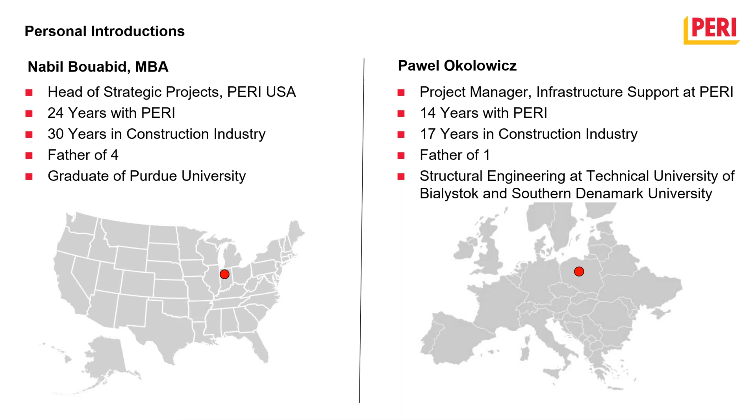Thank you, Pawel, thank you very much. Could you go to the next page please? I'm having Pawel presenting, so you're going to hear a lot from him, guys. We're going to be discussing today the LAX project, and we're going to go over a general overview of the project, an introduction to the balanced cantilever. We're going to speak a little bit about customer requests as well, and design processes that Pawel is going to present for us. And later we're going to talk about field challenges, assembly and disassembly, and after that we're going to move into a Q&A.

The LAX project is to modernize LAX and alleviate the heavy congestion typical in and around LAX. The LAX APM project is about 2.25 miles of elevated guideway, and it will be transporting passengers between 6 stations over the alignment. 3 stations are within the LAX terminal area, and 2 are at the parking garage transit center, and the final terminus is the new consolidated rental car facility.

LINXS Constructors JV is the contractor, and PERI, we were working directly with Flatiron on this project. PERI USA was awarded the cast-in-place segmental scope on the project only. We worked on the GW1, Westway Street, spanning over the parking lot with double span cast-in-place segmental. We also had GW4 spanning over Sepulveda Boulevard, single span cast-in-place segmental. And the last one was GW5 over Century Boulevard, single span cast-in-place segmental, which we will be mostly discussing in this presentation.

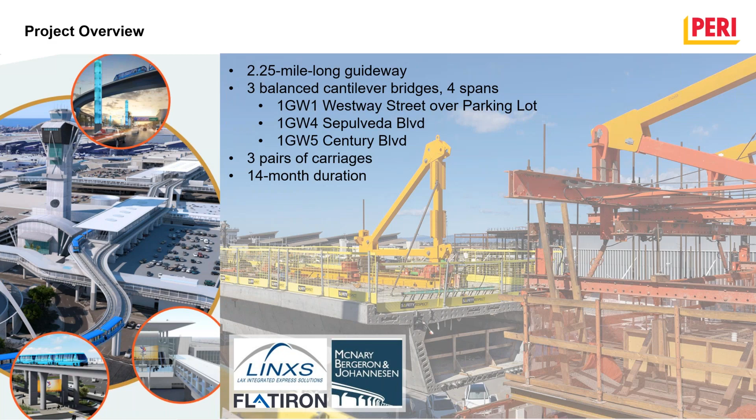Next page please, Pawel. Next one as well. A little overview of PERI balanced cantilever, as it's very simple and straightforward here.

We see the yellow frames on the top, and later you have the front main beam, the bottom platform, which is suspended from as well. You have the main truss, which holds everything together, and the bottom platform in the rear is also suspended from it, and you have the carrying rail for the carriages. We see the carriages and the carrying rail that are basically anchored to the deck with 2 rods, or 2 anchors each.

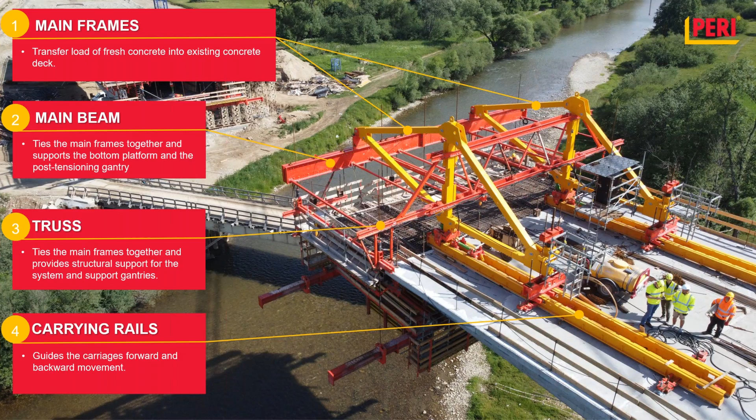We see here as well the internal formwork, the bottom platform, and we also have the external formwork, a straightforward system.

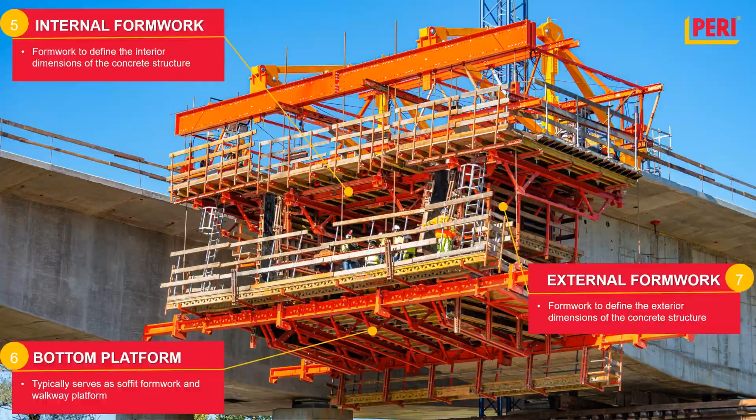I will turn to my colleague Pawel. He's going to discuss a little bit about geometry and the design process for this project. Please go ahead, Pawel. Thank you. Yeah, so thank you, Nabil.

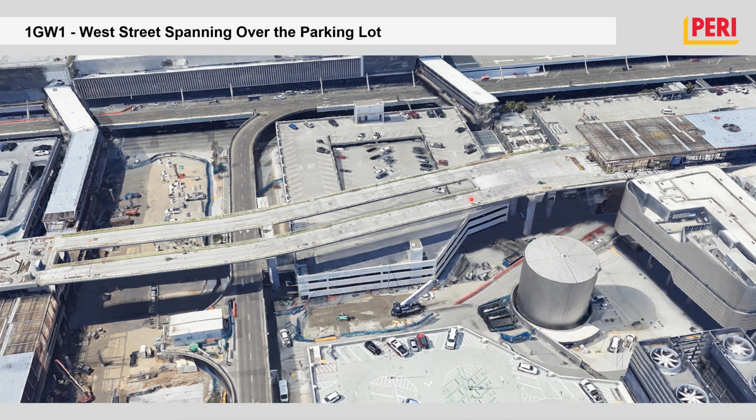I will speak a bit more about these viaducts, which were in the scope of our part. First, the longest one was a 2-lane viaduct spanning between these piers here. This part was actually done over the parking garage. If you look at the technical drawings, you see that it's a 2-lane bridge. What is interesting here is that the span itself, as it was designed, was not really symmetric. The left side here was 9 segments with 15 feet each segment, and on the right side there was only 7 segments. So there was also a closure pour which was 7.5 feet long.

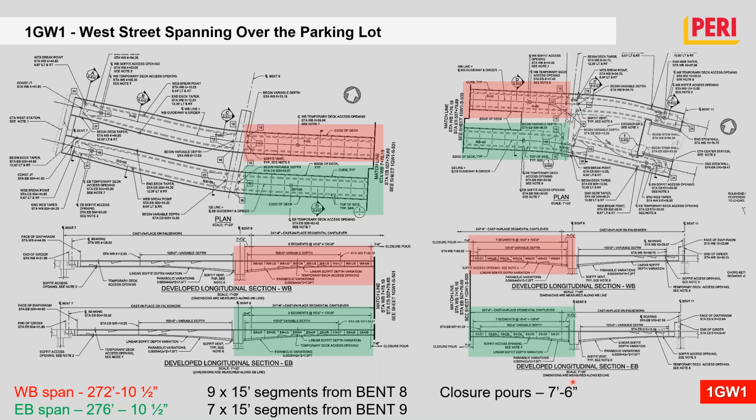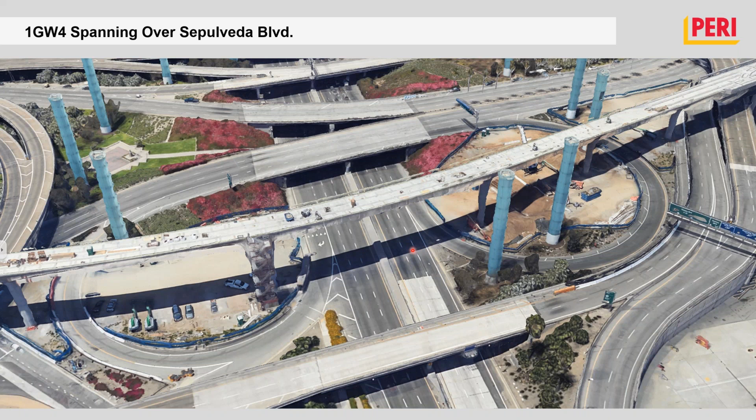So that was the longest, and then the next one over Sepulveda Boulevard, already above the traffic, so more critical than above the garage. It was 6 pouring segments at each side of the span, plus of course the closure.

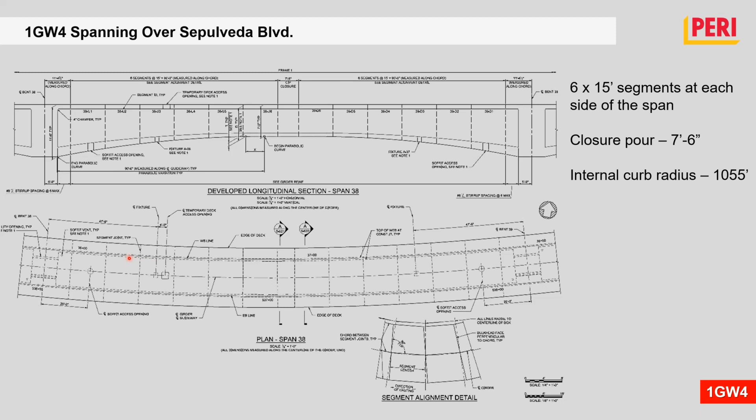That was already a little bit curved, but the curve is not so bad, not so critical, we don't need any special operations for such curves. But then if we look at the next one, I would say that was the most challenging one, because that's again above the traffic.

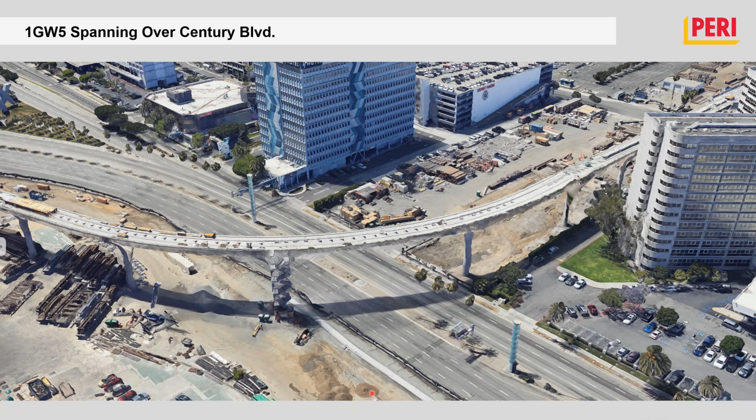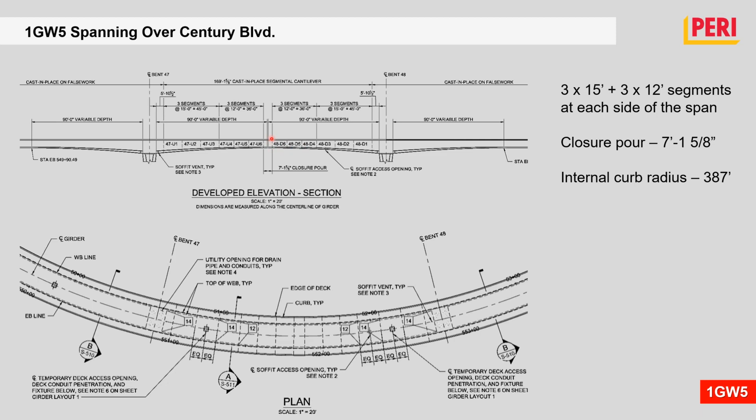That's actually the main entrance road, the Century Boulevard main entrance road here to LAX terminals. And that was actually also the most interesting, because it had this radius, it had a curve. We had to turn with the carriage a lot. The curve radius was 387 feet. Also interesting was that these segments were 6 segments at each side, but the first 3 of them were 15 feet, and then shorter ones at 12 feet, plus of course the closure pour a little bit more than 7 feet. That's already a nice picture that I got from Flatiron, thank you for that, a nice view of the construction of that viaduct.

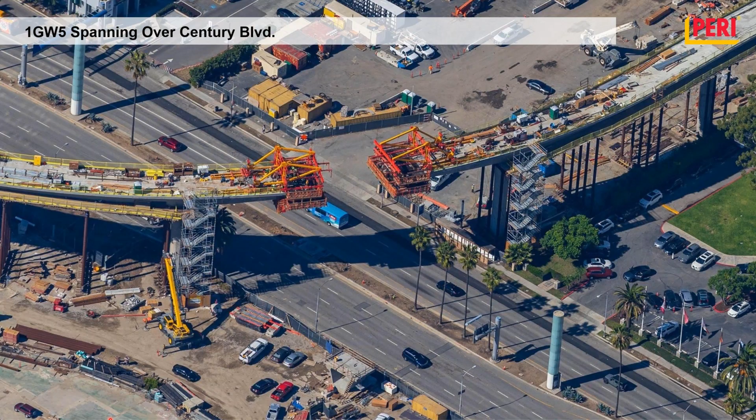So let's go to the concept, to speak more about the details, how did we approach the job at the early stage. First, when we are getting the geometry and planning our solution, for us the most important is to find out what is the geometry to which we are planning the system.

Pawel, I'm gonna stop you for a second, could you adjust your screen please, thank you, it's zoomed in too much. You are zoomed? Really, yes please. Thank you, I don't know, at my screen everything looks okay. No, it's fine. Okay then it's my screen, sorry about that. Yeah, it's fine. Okay, good, all right.

So anyway, we are getting back to that. Speaking about the geometry of the bridge, you're looking here at the cross section at 1GW1, pretty typical with inclined walls.

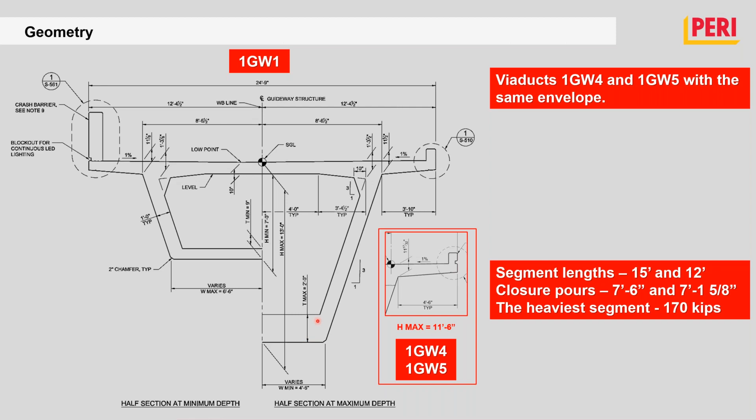And then there was 2 more viaducts, and very important for such a project is to minimize variations of the system. If we have 3 viaducts, the best would be that we could actually use the same carriage. Actually the design here was very nice, because if you look at 1GW4 and 5, they were a bit lower sections, and the only difference besides the height difference of the cross section was the wings, the side cantilevers.

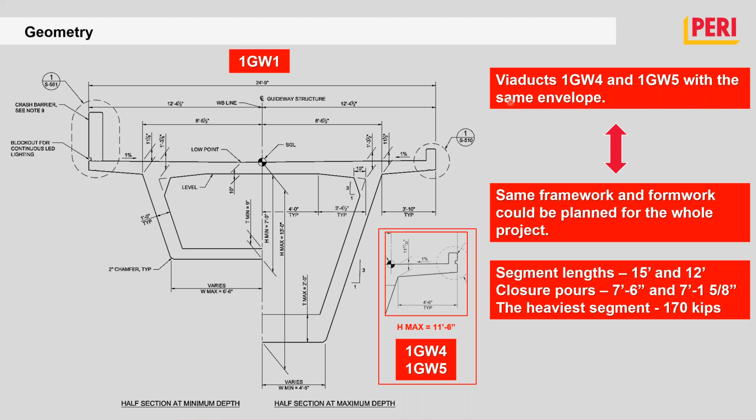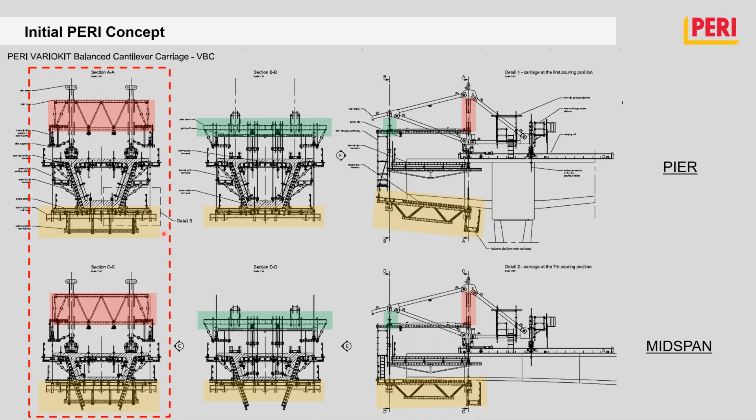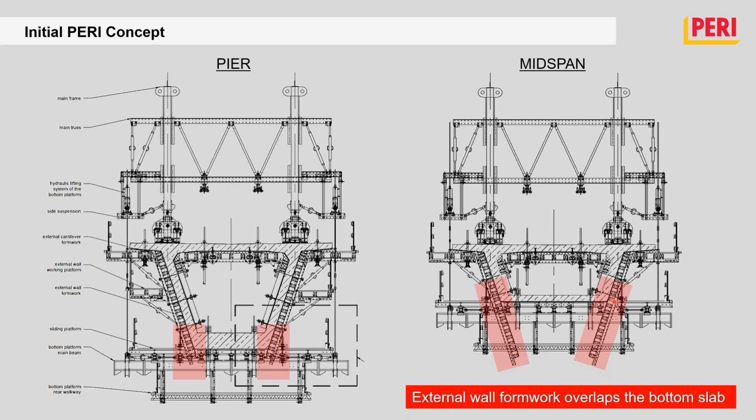Next slides, we're gonna focus a little bit more on these, just to zoom in a bit. So our initial concept and our standard solution for such bridges is to have external formwork overlapping with the bottom slab, that requires openings here. So as you see here, the external formwork is just a wall, actually sticking out a little bit down, but as I said, that requires openings. Then also another thing, speaking of our standard approach, is these side walkways.

We have these side walkways in order to avoid having any tie rod in the bottom slab or underneath. These walkways, if you look at them from a top view, are trusses which are pushing the external formwork to avoid having tie rods underneath. They are just transmitting the pressure of the concrete to this beam, so this beam is kind of a tie rod.

One last thing, speaking of the bottom platform, is the expandable formwork. As I said, the bottom slab needs to be expandable because it's getting wider as the cross section is getting smaller. These trusses here, you see them as a beam, but they are actually trusses, and they are slidable, especially the ones on the side. So that was the first concept.

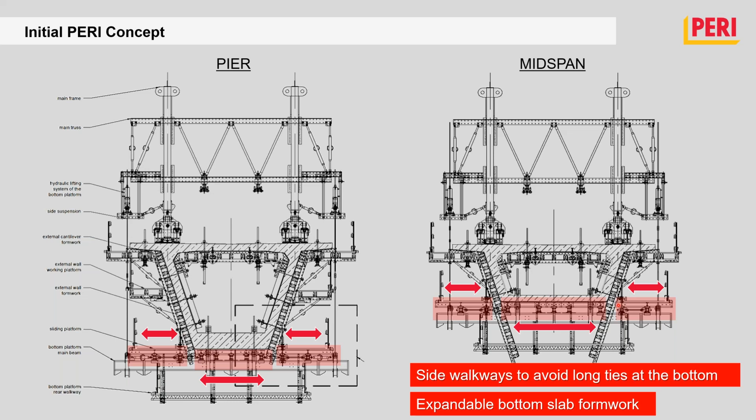That was the first concept which we presented to Flatiron. Then there were also some discussions later about implementing a rear trailing platform, which was supposed to be connected to the bottom platform. It's kind of a tail from which you can access the previously constructed segment, to do all the patchworking on the tie rod holes. You can also patch the anchor holes, or just do simple cosmetics if required.

Also, due to collision at the beginning with the pier, it was possible to hinge it down and then hinge it up afterwards, once we got to the segment where there is no collision anymore. But this was terminated, especially due to the fact that we are working above traffic, and this is a much bigger area to secure against any debris falling and so on. So this was terminated.

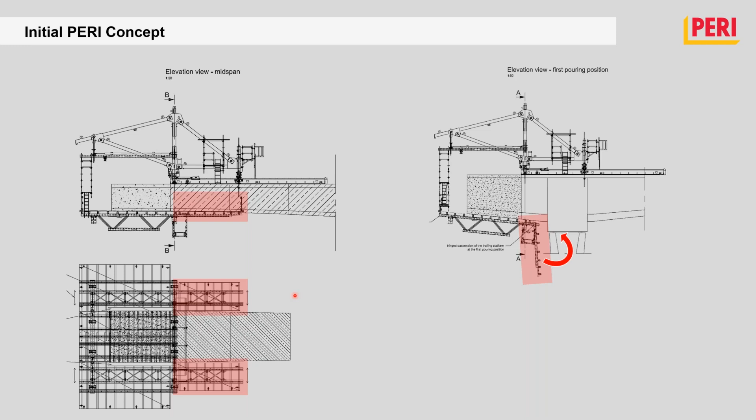That's already close to the final concept. After several discussions with Flatiron, we realized that there is traffic underneath in most cases, and we cannot allow anything falling down on the street underneath. So a solution was worked out together with Flatiron to make a full planking, fully closed planking on the bottom platform, with no openings, so that nothing can go through and fall down.

The change in comparison to the initial solution was that this external formwork was cut here. So any time we are launching the carriage to the next segment, this formwork needs to be cut as the cross section gets smaller. That's actually a pretty normal situation for internal formwork on bridges with changing height. We do it like that, and this part is just made of timber, so you just cut it.

The tie rod was also put underneath the bottom slab, as the bottom platform was a little bit lower. Here we had timber, and this was the way to secure the bottom part, especially where the bottom slab is higher, since we have bigger pressure from the concrete in the bottom part. So here we had our tie rod.

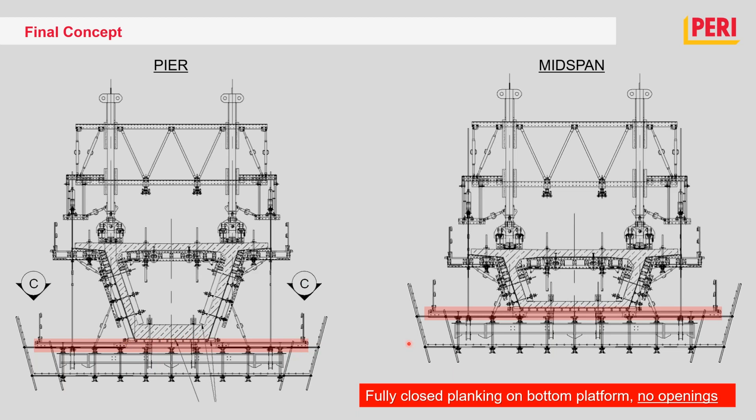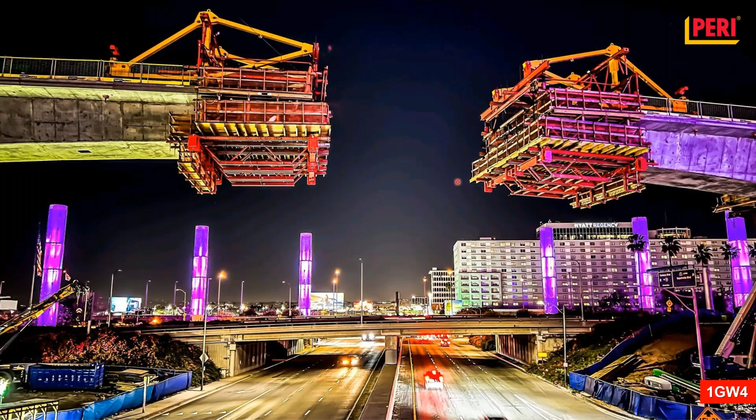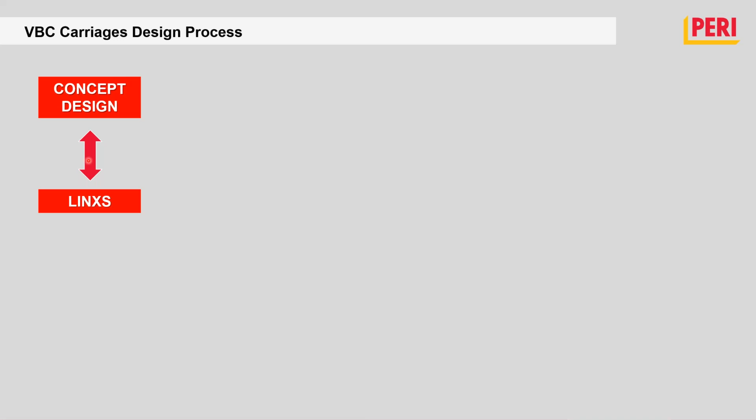Let's go to the design phase. The whole process was looking more or less like that: we came with a concept design to our customer, and then we worked out the concepts. We aligned our concepts, listened to the ideas and requirements, and that is how the final geometry was worked out.

Then, when we have the final geometry worked out, before we pass it to statics, once more we do a peer review with the customer. When this is accepted, we go on with the static analysis. As we have a geometry, we know how the formwork will look like, we know the critical cases, and this is the moment when we can already start with our analysis.

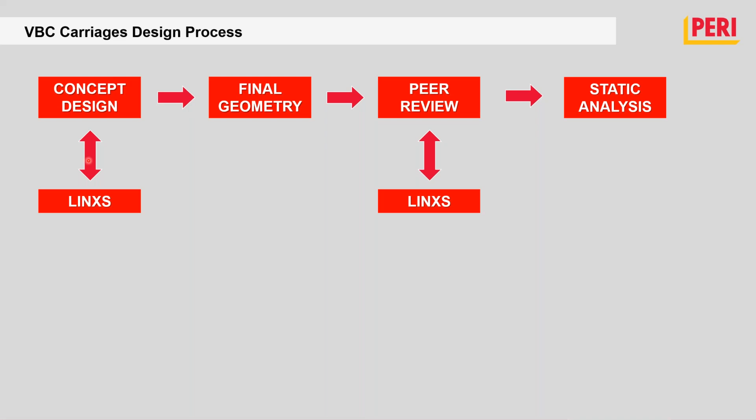If we know that all conditions from the static analysis are done, we can continue with production of assembly and general arrangement drawings, design. Then once more, the peer review, when let's say 80-90% of the drawings are finished or close to finished, before approving, there is one more peer review with the customer to see if everything, the drawings they will receive, is what they are expecting.

Then if we have a green light, we go on with approving the documentation and passing it to the site. In parallel, material lists are created and sent to the supply chain management department, which organizes all the parts to send them to the site.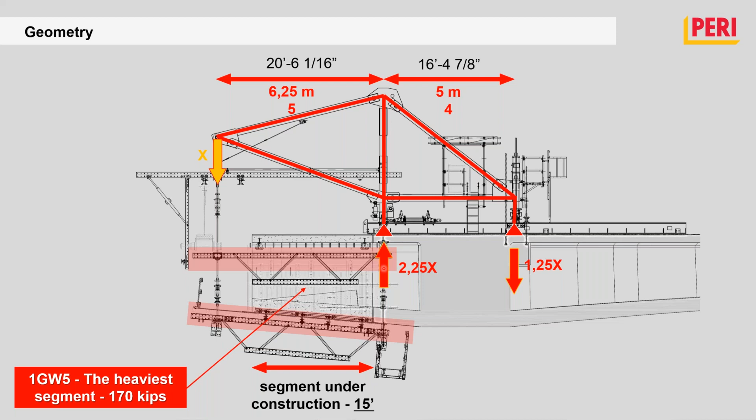One of the first things required for a global analysis of the bridge, checking the structure when it's loaded with the balanced cantilever carriage, is to provide bridge designers with the self-weight of the carriage - the complete self-weight. In this case it was around 135 kips - and the center of gravity, meaning where this load should really be assumed to act.

That was approximately 5 feet from the axis of the main column - meaning the center point of the main frame, the whole framework. So if this axis of the main column was 1 foot from the pouring joint, then it's around 4 feet from the pouring joint where the center of gravity was located. That's important for a global analysis of the bridge, I assume.

Also interesting is that one really movable thing here is the carrying rail. In the pouring situation, it's located on the existing concrete. We always try to make sure it doesn't stick above the segment under construction, so as not to be an obstacle to finishing the upper surface or even placing reinforcement. Then when this segment is done, the cross section's rail is launched forward on top of the existing concrete, and then the carriage moves on top of it.

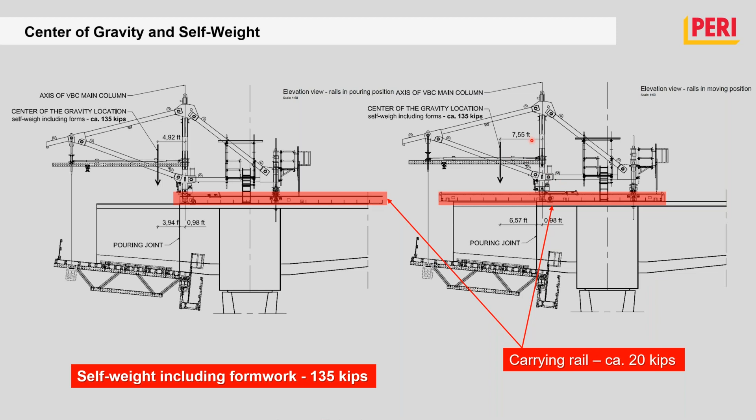This carrying rail weighed 20 kips, which influenced the center of gravity location by 2.5 feet. So once more, about the most important thing - the formwork.

We have several panels here. What you see is a cross section AA, in the plane of the main column of this frame. This is above the concrete where everything is anchored, and BB where everything is suspended.

So the internal formwork, as I said before, every formwork is anchored in the back and suspended in the front to the carriage, anchored in the back to the existing concrete. That's what you see here, and the suspension in the front here.

And then we have external formwork. In that case, this is connected to the wall and slab formwork, with only one anchor here, but also this formwork was supported on the bottom platform, because when we have inclined walls, it's not only the concrete pressure that has to be taken by the formwork. For concrete pressure we have tie rods going through the wall, but when the wall is inclined there is also a concrete load which has to be taken down, and that's why we have these spindles here.

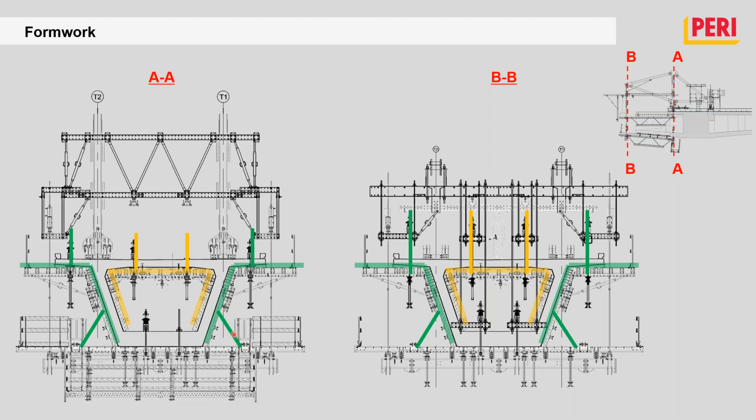The same here. And then bottom platform also anchored in the back, in the bottom slab, in this case in the concrete, and in front suspended at the same level, but this is suspension to the main beam. On the external part, outside of the concrete deck, we have a suspension to the truss and to the beam that is used in several situations, that is used to lift this whole platform from the ground by hydraulic jacks.

It was not done like that here because of the traffic mainly, but this is possible also to lower. But also when we want to launch the system, we cannot launch when we have all these anchors in the concrete. So when we are removing the anchors from the concrete, the platform is suspended on these external tie rods. This is actually DW26, and anchors normally we use DW40.

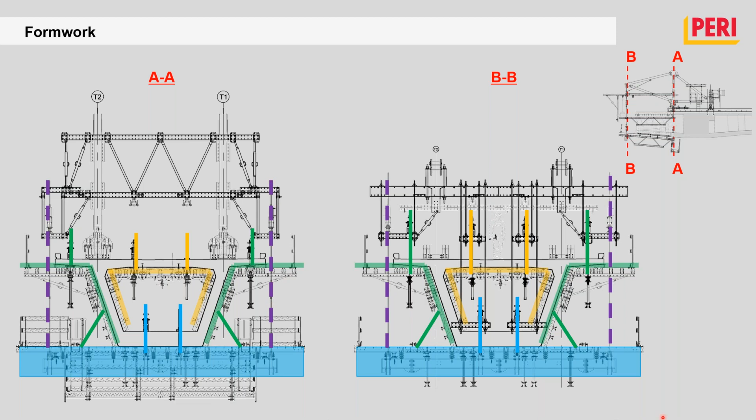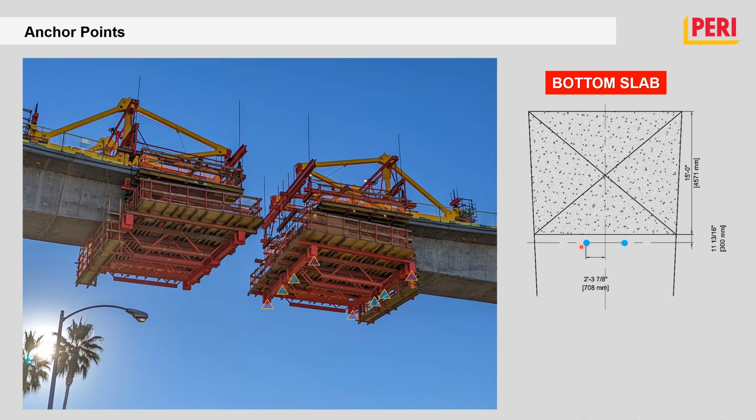So that's what you see here: front suspension, side suspensions of the bottom platform, and this is the anchorage in the concrete. That's already a bottom slab top view. Here is a pouring joint, and these are the two anchor holes for the bottom slab.

Then the complete picture of the anchor sleeves location. That's the same story here. Top slab, we needed, in that case, 8 anchor holes in the top slab, plus 10 anchor, plus 2 anchor holes to erect the next segment.

So the picture on the left shows external formwork, also part of the bottom platform. It's one anchor here, as you see, the same symmetric situation at the other side. And you have 2 anchors here, because it was 1GW5, where we have added an additional pair of anchor sleeves for every frame.

These squares that you see here are the place where the main frame is standing. That's a location above the wall of the main frames, and this is the anchorage. In case of 1GW5, we had to turn with the carriage, so we couldn't bind ourselves to one hole. It's much more comfortable to have 2 holes. I will show you in a moment why.

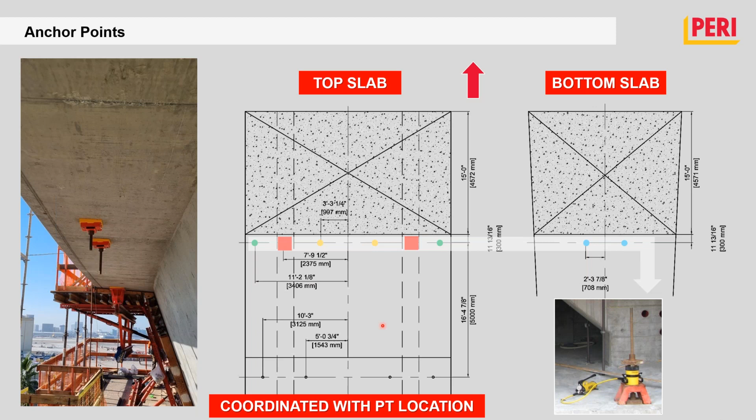And then the anchors of the formwork. Every anchor was pretensioned with force before pouring. And then of course there is required coordination with bridge designers due to PT locations of the PT cables. So it's always a challenge at the beginning to fit all these anchor holes between the tendons.

Let's go to reaction forces. I was saying that these squares are actually the location of the main column, this center part of the mainframe. Reactions here were the highest actually from the whole arrangement, 143.5 kips. Then in the back, I'm just giving the maximum from the whole project, spreading between 20 and 25 kips for each of these anchors.

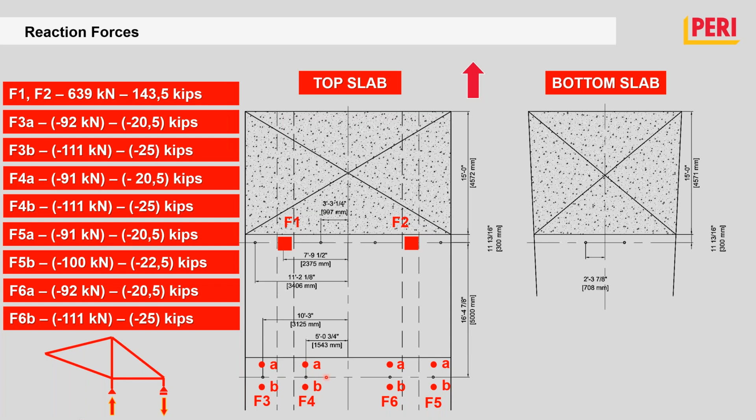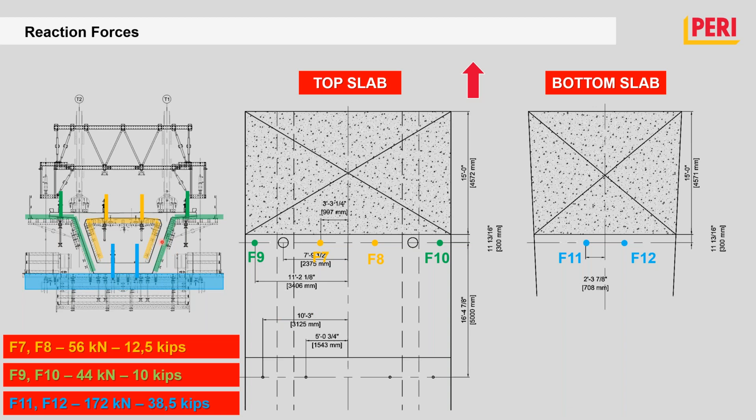Then formwork, internal formwork, 12.5 kips for each of these two. Then external formwork, a little bit less, 10 kips of reaction force. And in the bottom slab, a bit more because it's taking a bigger slab, it's also taking part of the load of the wall, 38.5 kips. That was the maximum for each of these two.

And all of them were pre-tensioned with force, with the hydraulic jacks, with the forces given here: 39 in the upper slab, 42 around, of course, because with the pumps that we have, you cannot really get the exact match, but around that.

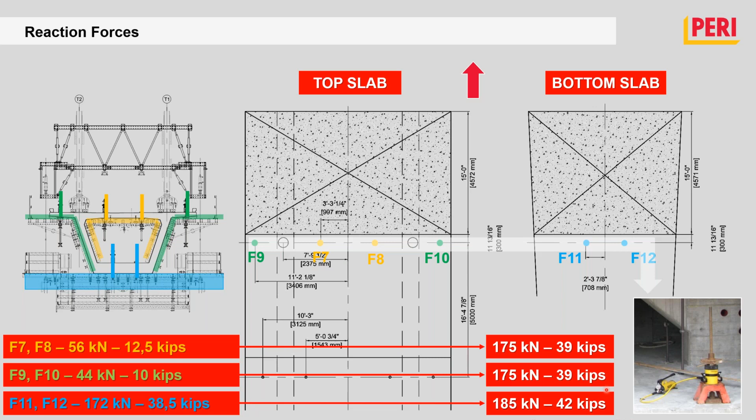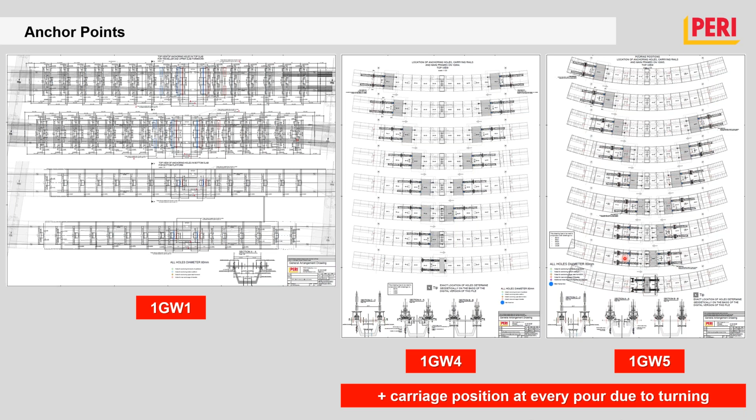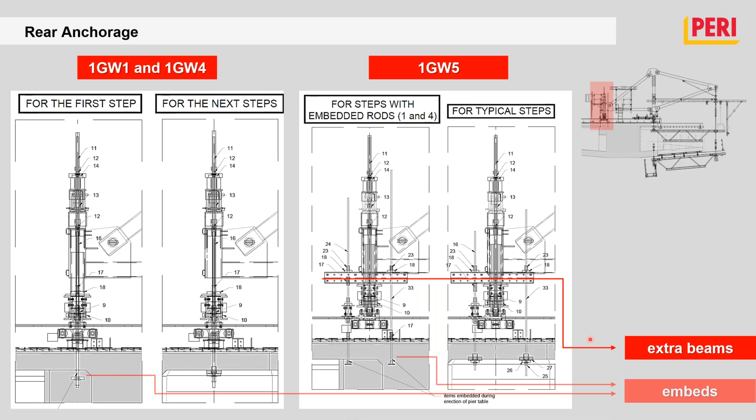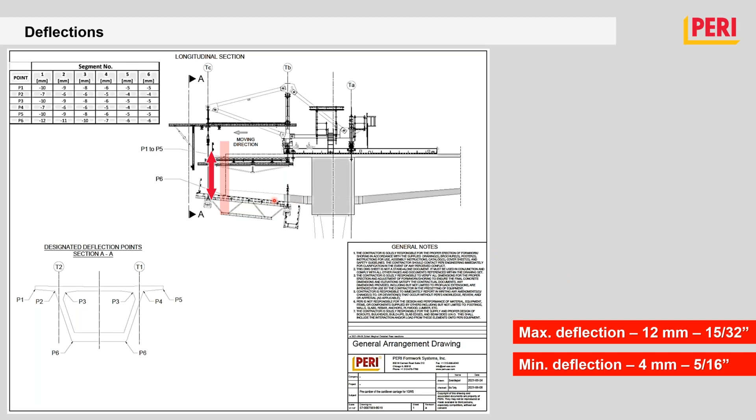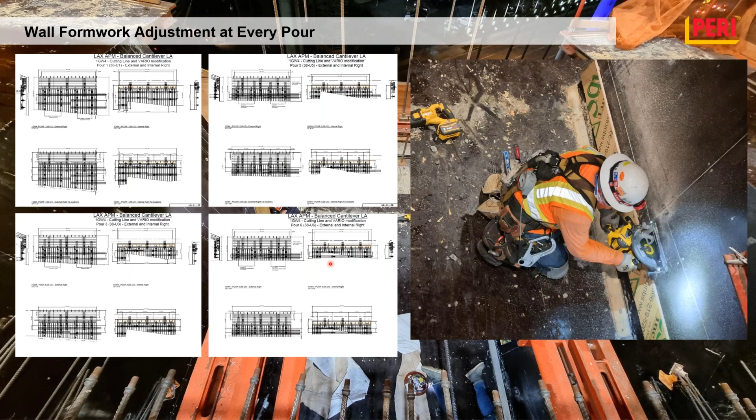As I mentioned at the beginning of my slides, we prepared the final solution where formwork panels, external as well as normally internal, and in this case also external formwork, were cut to the size of the segment. Here you see a guy preparing the formwork length for the next pour. For that situation, we provided the layout for every concrete segment in the project, including the cutting line showing how to cut the formwork, how to arrange the walers, and how to locate the tie rods. That was done for every segment in the project.

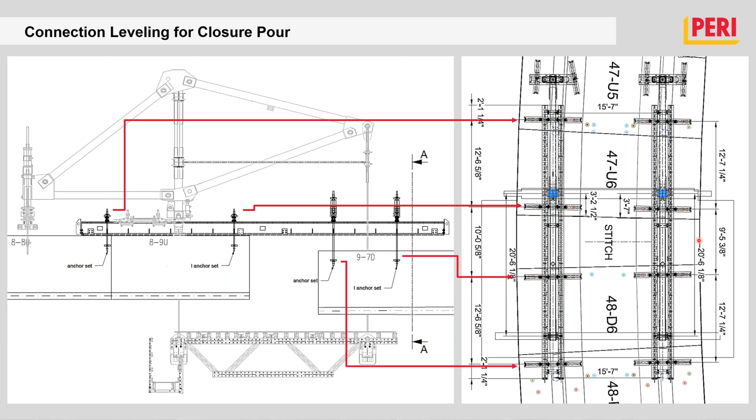So here is a top view that you see. Here is a stitch, and it looks like that. You see here our carrying rails used to level in a vertical direction these two sides, but then there were added extra beams, kind of distance beams. You see also the jacks to keep the distance between the sides of the span. When this is fixed, we can then pour the concrete.

Of course, before pouring the concrete, formwork needs to be adjusted. And as I was saying at the beginning, every formwork, when we pour the concrete, in the back is anchored to the existing concrete, in the front is suspended to the carriage. That is not like that.

When we do the stitch section, normally formwork is anchored in the back and in the front, actually in the place where it was normally suspended using almost the same gear, but then the front is also anchored to the concrete at the other side, and the carriage is actually standing beside that.

This is not a kind of ballast for leveling of the bridge, but it's just standing there to pick up the formwork later, move back or lower it. So it just becomes a device to transport the formwork, because the formwork is anchored completely to the bridge.

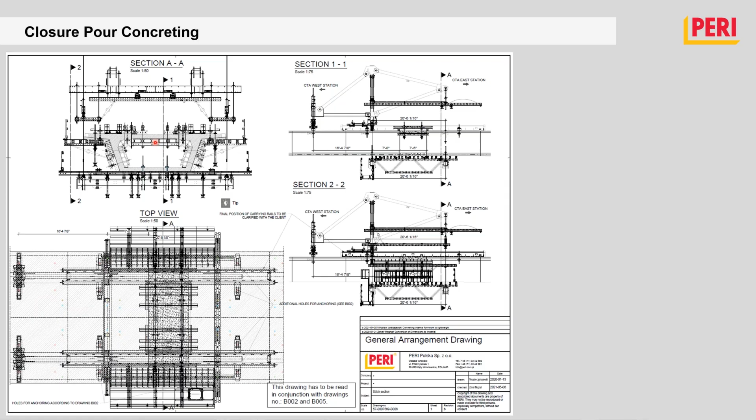Maybe you manage. But then here, internal wall formwork was left as wall formwork, but then the top slab formwork was stick built, so it was just done on the job site, prepared on the job site. So that was the stitch done, and not long here.

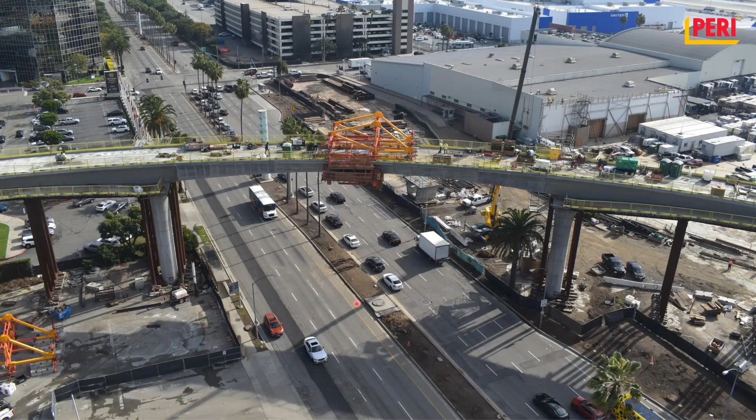You see one more view, one GW5 after putting the stitch section, and then the next day you can see that. So that was my last slide.

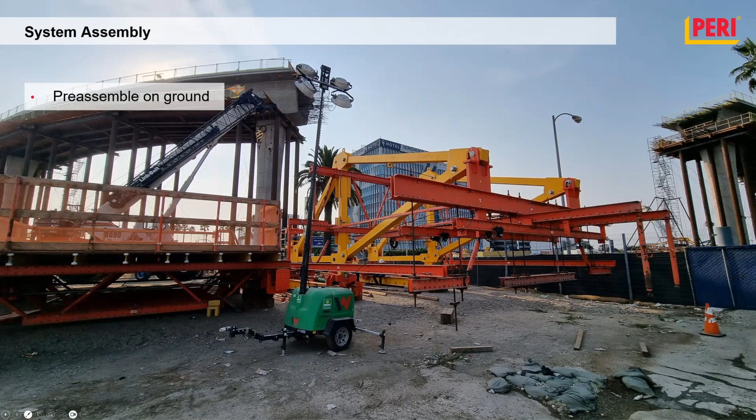I hand over to Nabil. You'll speak more about assembly. Thank you, Pawel. We're going to stay with 1 GW5 and Century Boulevard. We're going to talk a little bit about assembly. It's 6-lane traffic, 3 on each side.

The contractor was permitted for assembly to close 1 lane only, by bent 48 to the pier, what we see here, and the staging area. Working hours were scheduled between 10 p.m. and 3 a.m. in the morning, when traffic is very low during the night, and we were pre-assembling everything on the ground wherever we could, the carriages, the platform, and the formwork.

We see here the carriages, the main beam, and the platform on the left. And it took... Pawel, next page, please.

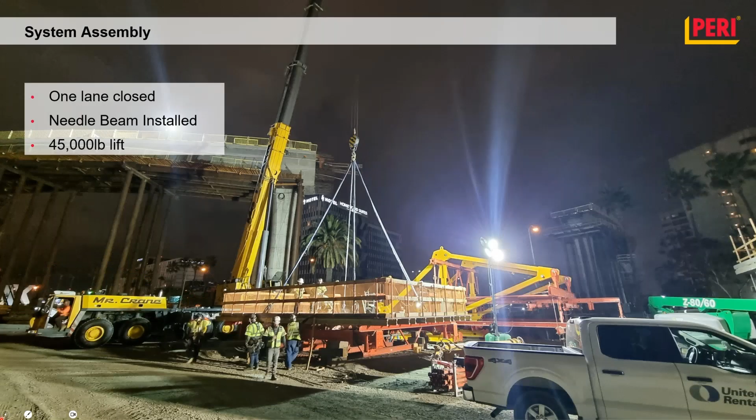It took us one night shift to lift the platform in place, and basically 2 shifts to set the carriage and the formwork. So here we are lifting the platform in place, and it's about 45,000 pounds.

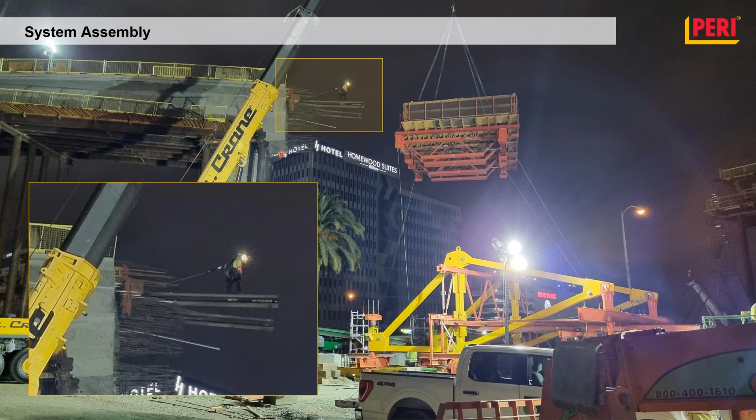So usually in a case like this, we did this differently. When you stage the balanced cantilever, you bring the frame first, stick build the frame, put everything on the deck with the pier table, and later lift the platform, and you can use the jacks to jack it up with 4 rods in place, or the crane, hoisted with the crane.

In this situation, it was best to pre-assemble everything on the ground. It's safer wherever we could, and lift it into place. So now we started backwards, starting with the platform, suspended from the front with 2 I-beams, as we see over there, and later we brought the carriages.

Next page, please, Pawel. Here we see the carriage coming up with the main beam in the front and the truss. Of course, you've got to provide the center of gravity for the crane guys, and it was about 44,000 pounds to lift, I think. This is the yellow frames, PERI. They are pretty light, 5 tons per frame. Next page, please, Pawel.

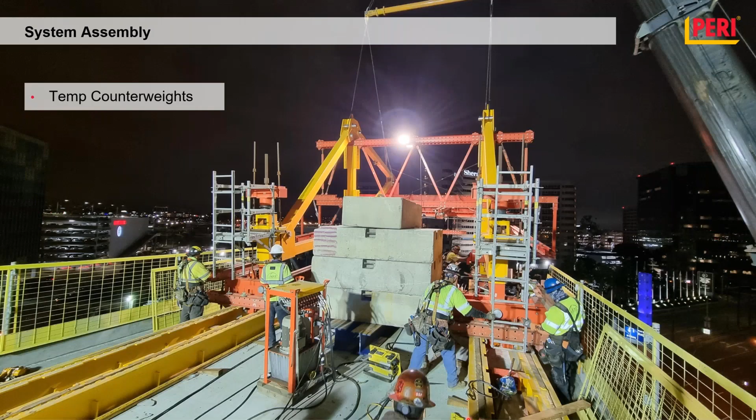And here we can see as well the counterweight on top of those I-beams. That's what we use to keep those I-beams cantilevered. Of course, it's all calculated and making sure everything is safe.

And now we are placing the main frame on the carrying rails. As soon as they are secured, the platform is suspended. We took down those temporary I-beams and the concrete counterweight. They were removed. Next page, please, Pawel.

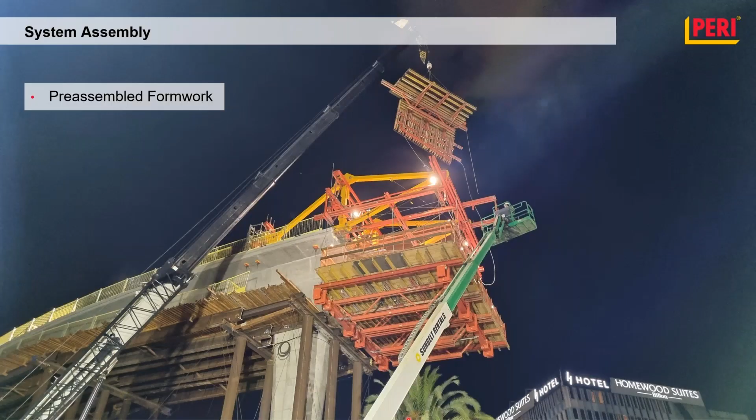Yeah, and here next day we are basically lifting up in place the pre-assembled formwork. Of course, this one was done with one lane closed of traffic close to the pier. Went for it. All right, go ahead to the next page, please, Pawel.

Yeah, basically three shifts, three nights to complete the project, lifting the platforms and the carriages pre-assembled with the pre-assembled formwork, on next day here. This picture is driving actually from the hotel going in, and that's what you see in the morning was done during the night.

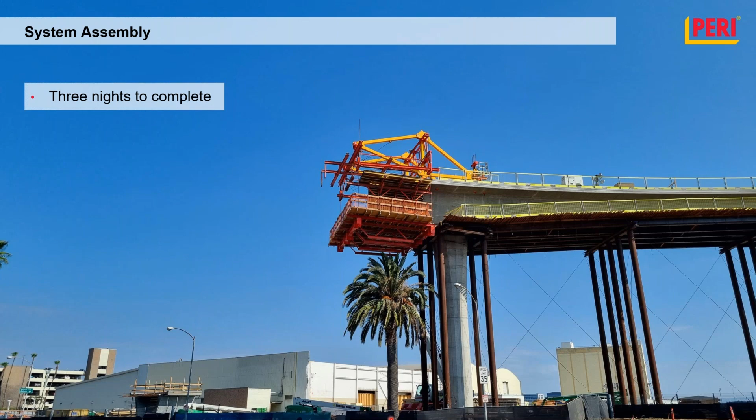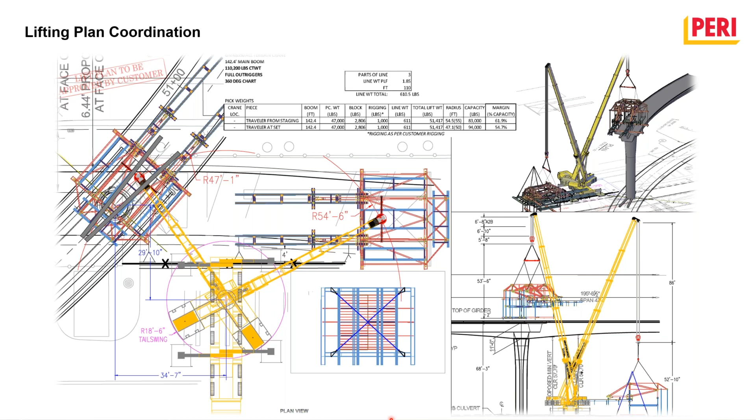Yeah, I mean, we see with this slide some drawings here, and this slide basically shows everything came together perfectly because of the planning process and communication with all parties, including the crane company and the contractor and everybody involved, to ensure, as a team, we work together to ensure the safest operation possible. Next page, please, Pawel.

Disassembly, touch a little bit on disassembly. Also it's a little bit, again, job site conditions. You adapt to the situation. Like I said, lanes, we were not allowed to close the lanes. Now on this one here, as possible, low traffic, they closed two lanes on each side. We end up dropping the bottom platform onto the flatbed, move it to the next project.

Two situations we can have: the carriages can back-launch to the pier table and be disassembled at the pier table, and sometimes as well we did basically pick the carriages from the top and put them on a flatbed and move them to the next segment. Of course, you've got to have permits and all that planning for this.

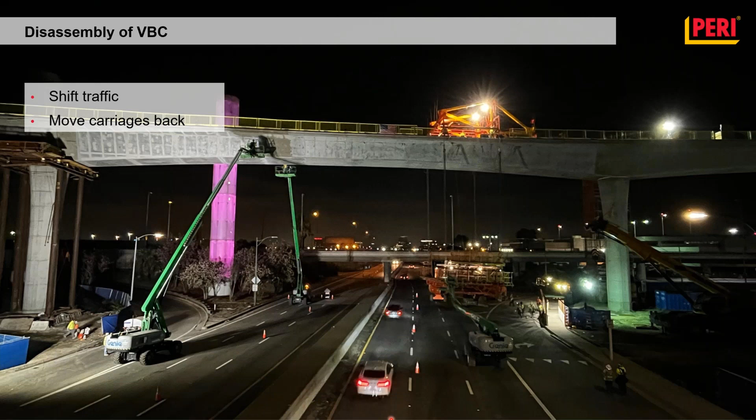Pawel, next page, please. And here we can see the platform coming down on a flatbed here, and traffic was shifted around as needed. Next one, please.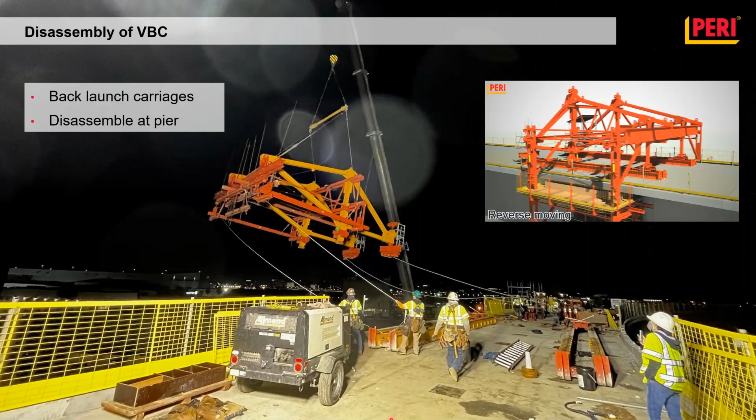Can you hit another one too? And here we can see as well, you can lift the carriages from the closure pour, put them on a flatbed, or have the carriage travel backward or launch backward to the pier table for disassembly. Next one, please.

I think that's it. If you have any questions, give it back to Greg and Wade, and thank you very much.

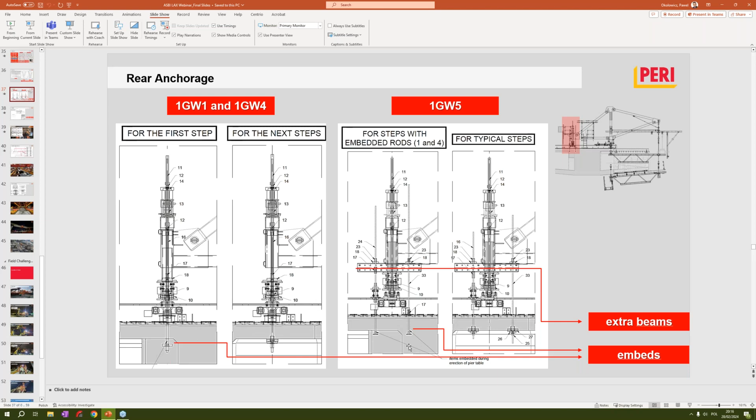Okay, great, one last question. For curved bridges like this, it gets pretty interesting with a lot of little details. Was there an effort made to curve or warp the web wall forms, or were the web wall forms chorded for each segment? They were chorded.

Also, talking out loud, there are two ways in the system - we could also introduce a turning mechanism to that as well if we had to, but the whole thing was chorded, yes.

And that's the reason the pour segments - I think we're looking at - they started with 12 foot, then went to 15, and then back to 12. So usually you should do the opposite, and that's what they did, to give it a nice curvature there.

Okay, all right, very good. Well, once again, thanks for a great presentation - lots of interesting details in there - and I'll turn it back over to Greg to take us out.